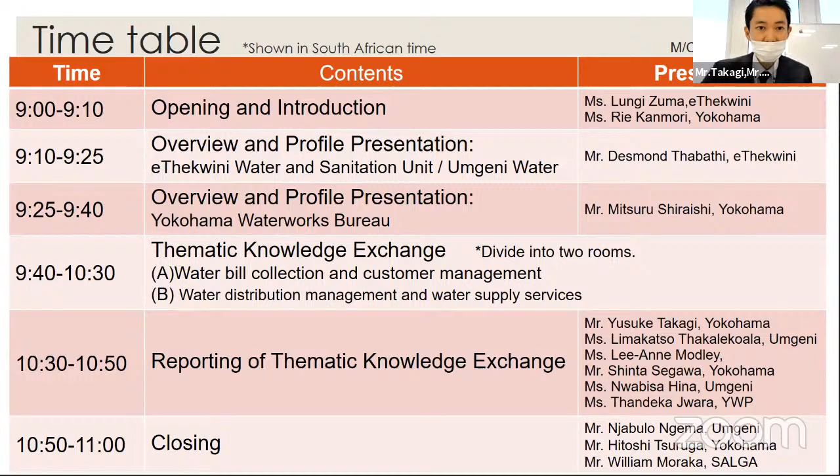Thank you very much, Mr. Takagi. Good day, everyone, and thank you for attending this knowledge exchange seminar between young water professionals from Durban in South Africa and Yokohama in Japan. From the South African side, we are joined by young water professionals from eThekwini Water and Sanitation, the water services provider in eThekwini municipality, young water professionals from Umgeni Water, the bulk water supplier within the province of KwaZulu-Natal, and young water professionals from the Water Institute of Southern Africa, WISA. These three organizations cover a sizable portion of the young water professionals working in the water sector in our city and province of KwaZulu-Natal. So from the South African side, I believe we are well represented.

I'm hopeful and certain that the seminar will go well and both parties will learn from each other, contributing to the improvement of the work we do for our citizens and residents in our respective cities. Let this newly formed relationship not end here, and let us carry on engaging on a smaller group basis, based on our different work areas. So colleagues, with this short introduction, I wish us fruitful discussions for the rest of the seminar.

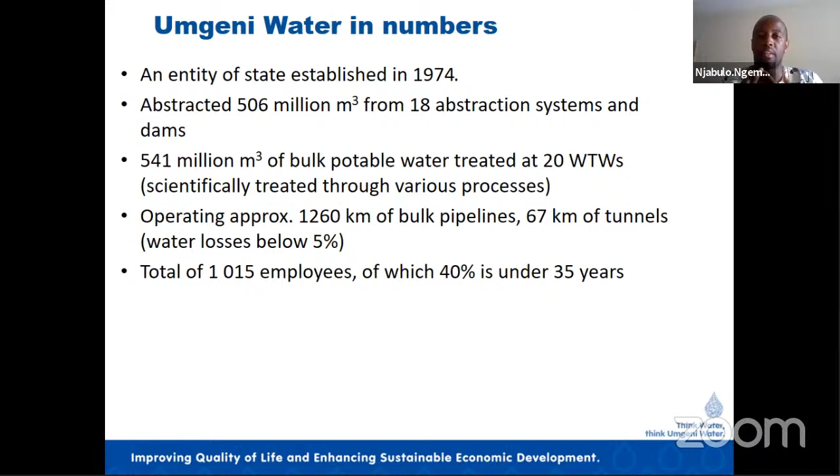Organizationally, we are not that big as yet. We employ just over 1,010 people, and interestingly enough, 40% of our total population are under the age of 35, which makes us a fairly young, dynamic organization. It's always interesting when one is given opportunities to participate in knowledge sharing exercises at this age.

So we're a fairly young organization age-wise. As I said, we supply at least 7 municipal customers at this moment in time, and the population that we supply is closer to 9 million. Take into account that eThekwini, or the city of Durban, is the most populous city in the province, so I think the numbers are around half of this, around 3.7, 3.8 million, I'm not too sure. But this means that the city of eThekwini is Umgeni Water's biggest customer, in simple terms.

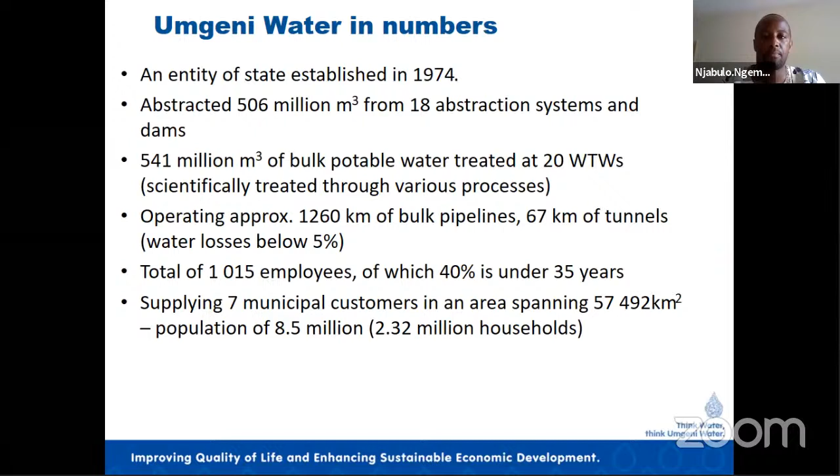The entire province of KwaZulu-Natal is home to about 11 million people, and 70% of that population is found in this tiny corridor of the cities of Durban and Pietermaritzburg. This is where the backbone of Umgeni Water's bulk infrastructure resides. So it's by no fluke that eThekwini is our biggest customer, that's where most of the population in the province is situated.

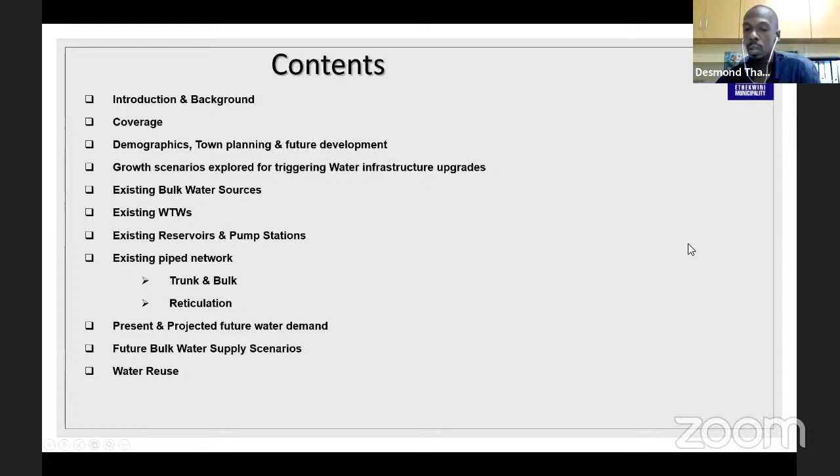As might have been highlighted by Umgeni Water, EWS is a water services authority, and obviously we need to comply with the requirements of the Water Services Act. We are a metropolitan municipality within the KwaZulu-Natal province with diverse cultures, demographics, and town planning schemes.

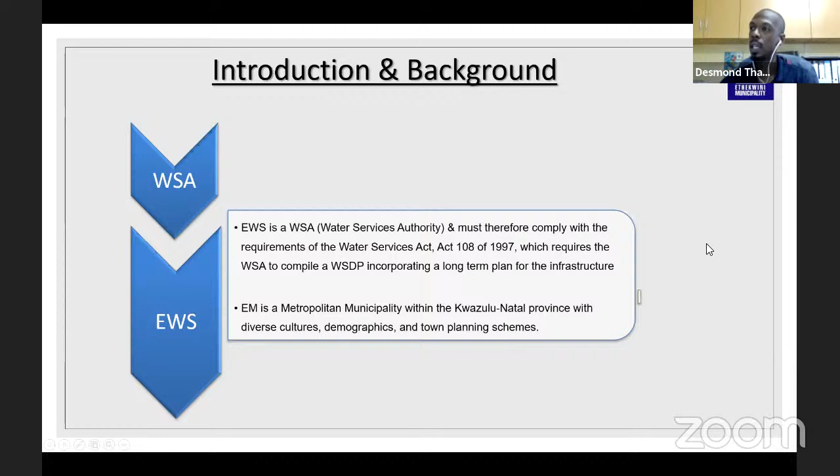From about 2 slides before Njabulo ended his presentation, he showed a larger overview of the KwaZulu-Natal province. We constitute about 2,500 square kilometers within the province, and within eThekwini municipality, we are subdivided into 5 regions: north, central, inner west, outer west, and south.

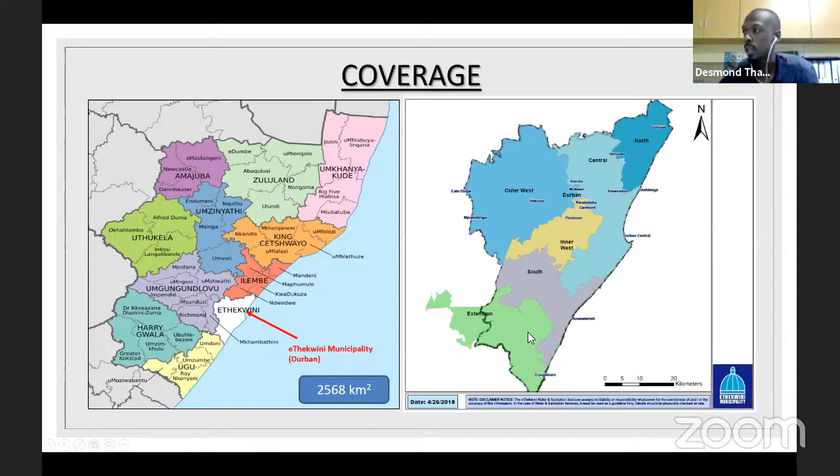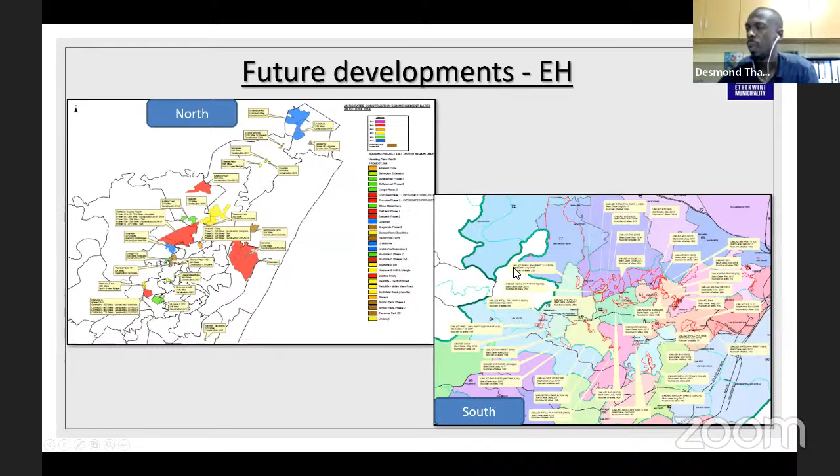There are a few developments earmarked within the municipality, some being private developments and some managed by or introduced by the government as human settlement developments, which puts a strain on the current supplies and storage capacities of the current setup. Some are just examples of developments already earmarked in the municipality, and there's a whole lot of them which we would need to provide water supply to.

Sorry, is someone trying to say something? I don't think so, so you can continue. Okay, alright, thank you for that.

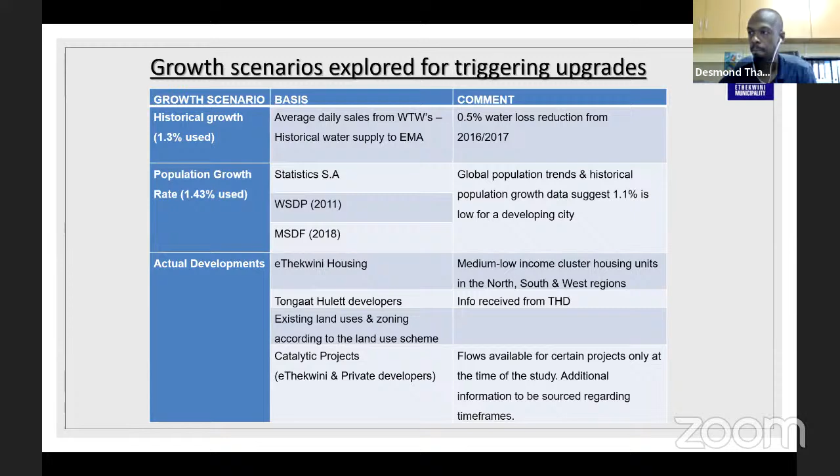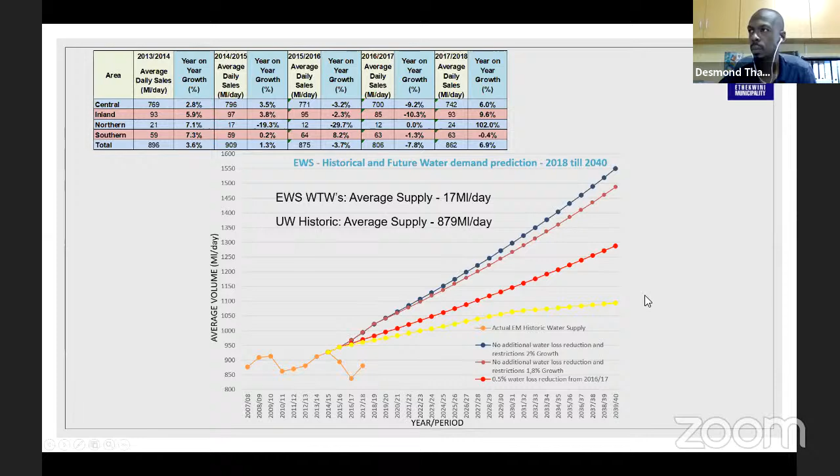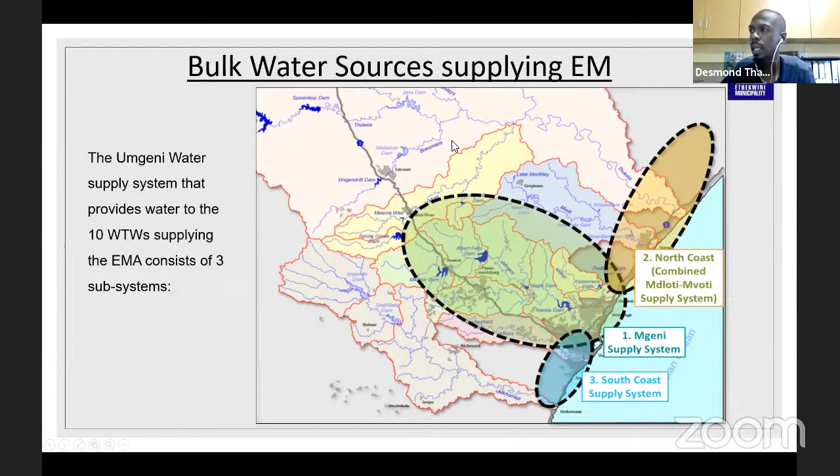Again, this was covered by Umgeni Water. Our supply comes from the Umgeni system, and there is a planned supply from the south coast and the north coast, as outlined in the Umgeni Water presentation earlier on. That was also covered in Jabulo's presentation, where he spoke about the Mearns Weir and Spring Grove Dam that he mentioned earlier.

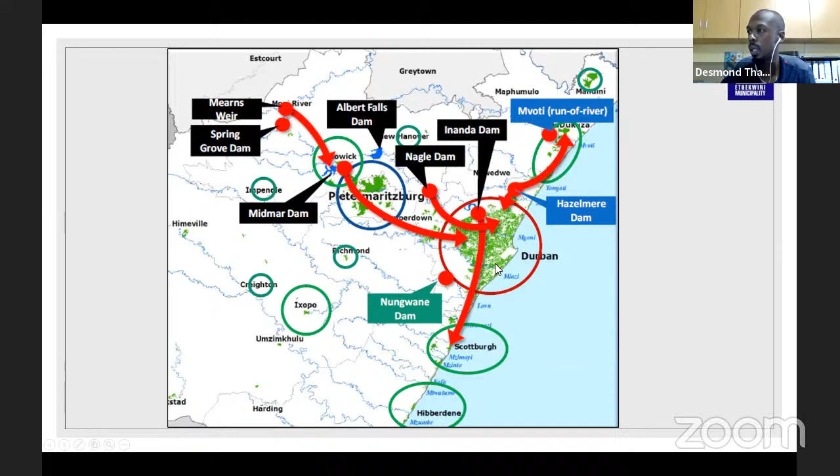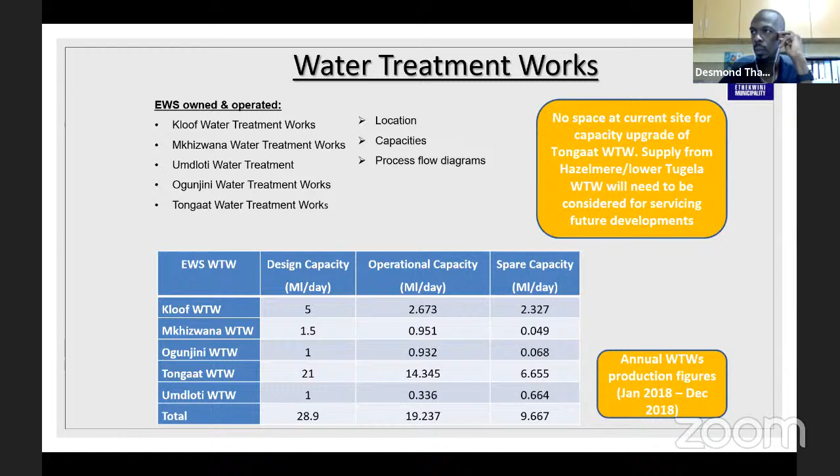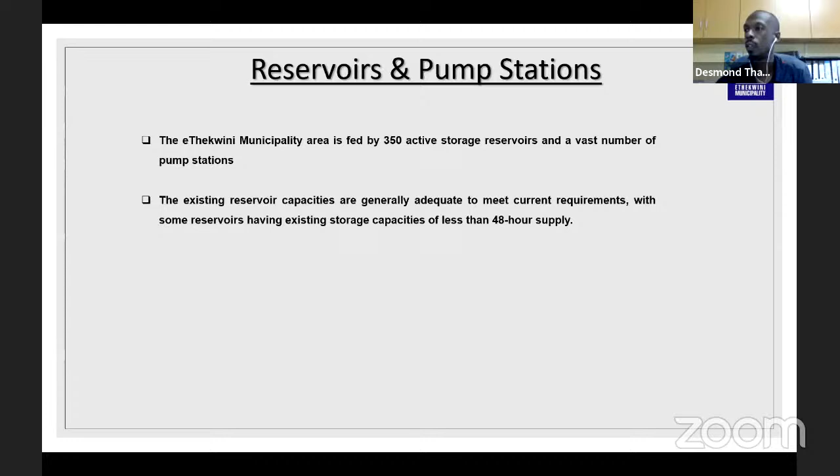eThekwini municipality is fed by about 350 storage reservoirs and a vast number of pump stations within the municipality to push water to our consumers. The existing reservoir capacities are generally adequate, although some are still lacking in terms of providing 48-hour storage for consumers during load shedding periods, and of course if there are major bursts and leaks that we need to attend to.

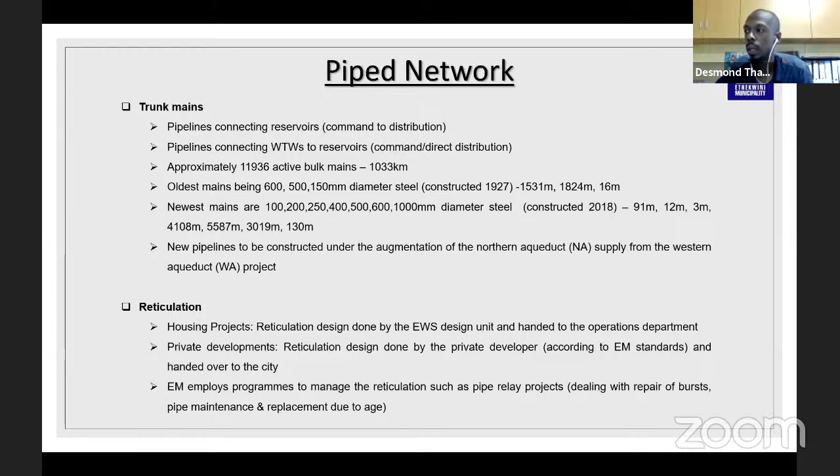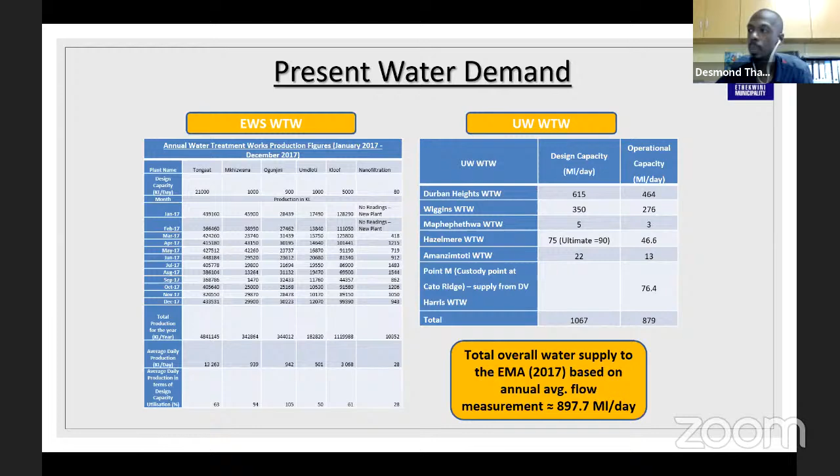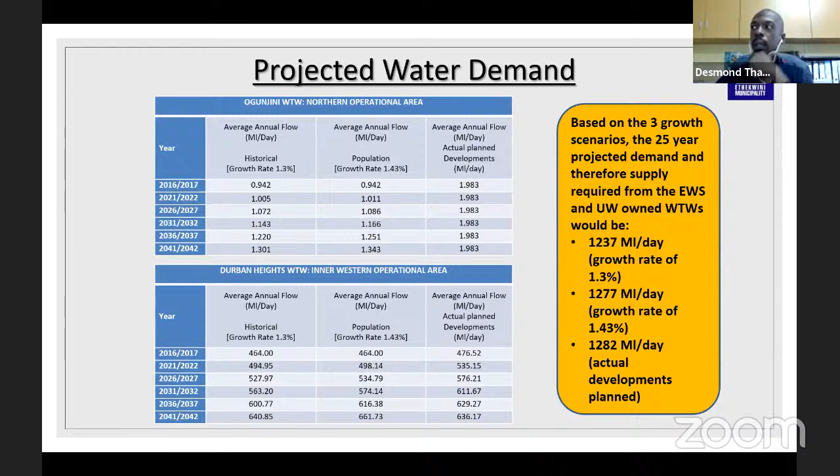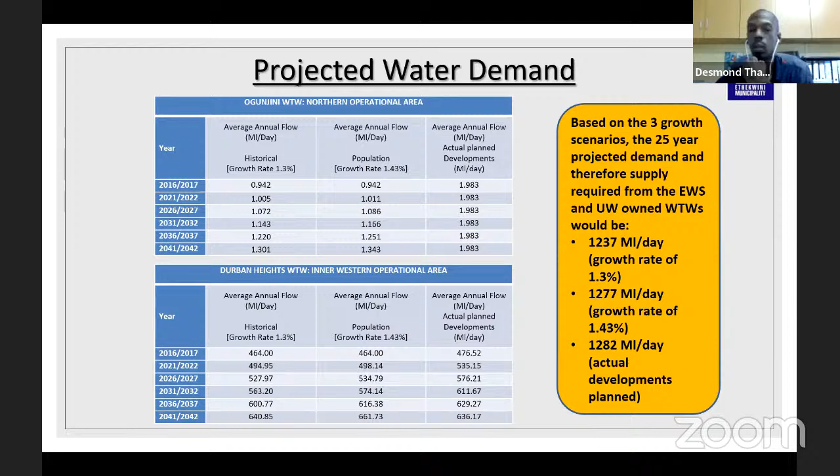The water demands currently, based on a couple of years back, averaging about 897 megaliters per day, and that may have changed by now. I'm pretty sure Jabulo would have covered that in his presentation. Based on the three growth scenarios, the 25-year projected demand therefore requires that EWS would need to upgrade or construct new storage to meet the demands that are required.

There are a few supply scenarios that have been looked at, which is getting water supply systems that would feed the Umgeni water, eThekwini municipality, in order to meet the requirements over the next 25 years. That includes some schemes down in the north and the south coast of the municipality, and of course from the Umgeni water system.

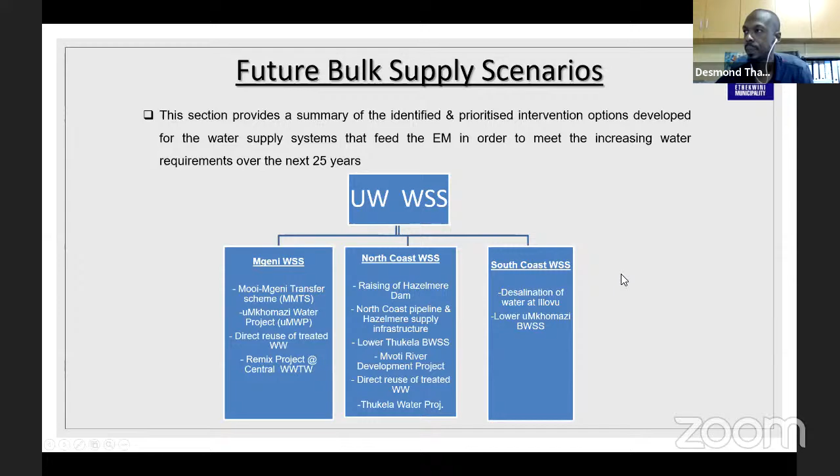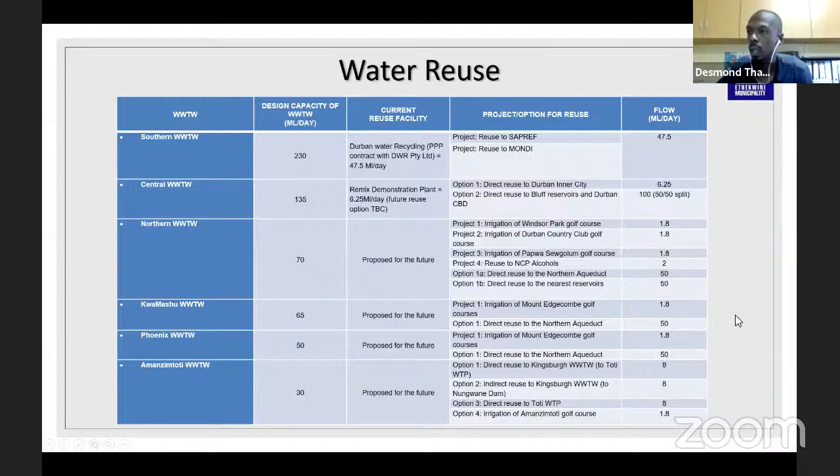There are also options that have been looked at, which is looking at the reuse of water, being the clean water or wastewater resources that we can tap into. That would mean looking into the various wastewater treatment works and seeing solutions out of that. These are just a few wastewater treatment works that have been looked at as possibilities for water reuse, and that's just a few more of those. So as you can see, there are a couple of wastewater treatment works that we could be using for such a solution.

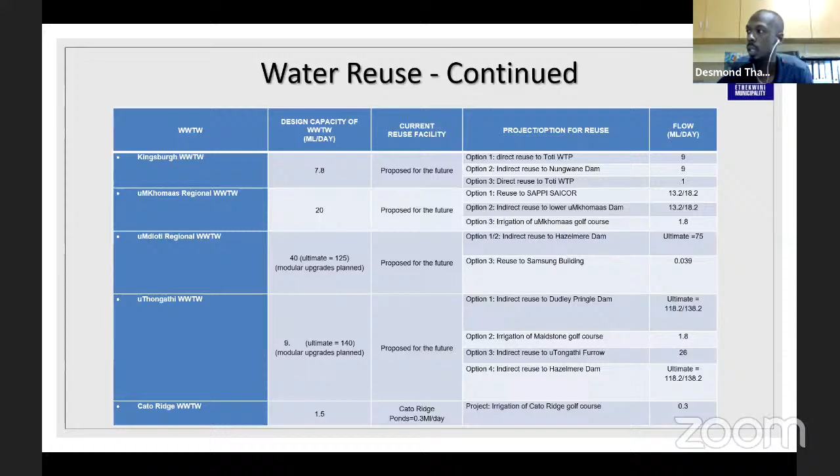The current challenges we experience as eThekwini municipality is the SCADA system and the telemetry infrastructure, which would go a long way in making sure that we do not have any outages or extended water losses within our systems. Of course, cathodic protection is one of the other issues that we are having challenges with. The current system or protection that we've got is either vandalized or is not operational, so that obviously affects the lifespan of our pipelines.

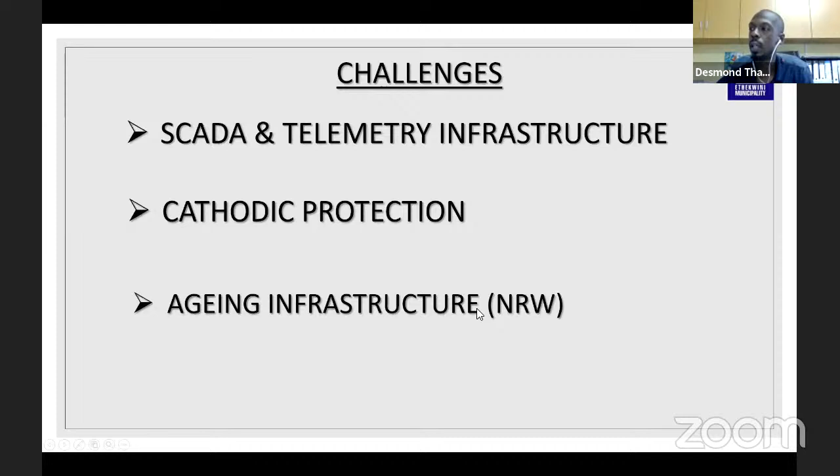Aging infrastructure is a serious issue as well. Some of the pipes were laid in the 60s, 70s. So pipe relay programs are obviously some of the options that needs to be looked at in order for us to reduce our non-revenue water amount.

I think, due to the time limitations and all that, we've tried to summarize as best as we can. And I would like to thank you all for the opportunity, and obviously thank our consultant for putting together the information for us.

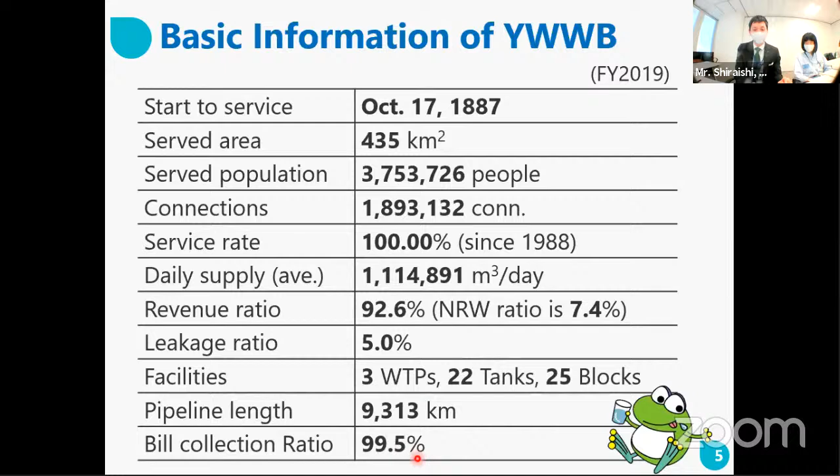This graph shows the transition of daily supply volume. Population is still gradually increasing in Yokohama, however water supply volume is declining. We experienced severe water shortage in the 1990s, particularly in 1995.

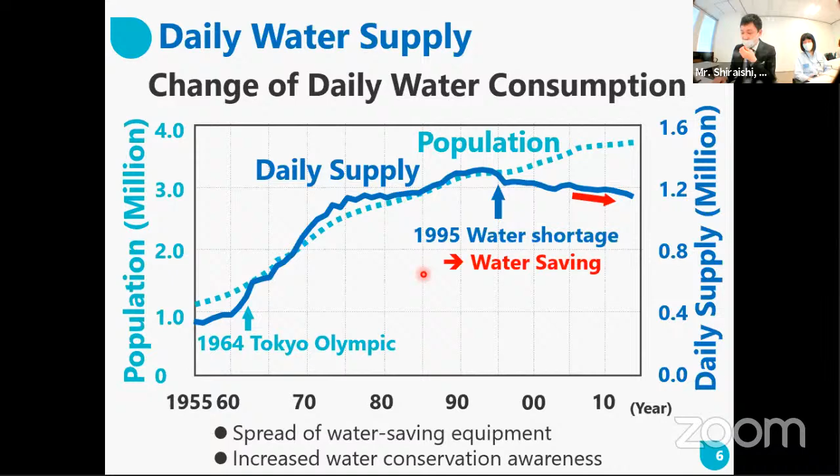We had suffered from a severe dry summer, and we campaigned saving water to citizens. Since then, water supply volume shows a downward tendency because of citizens' consciousness to save water and the effect of water saving technology. This tendency affects our revenue, and now our management circumstance becomes severe.

This is the water supply system of Yokohama Waterworks Bureau. We have 3 water treatment plants here and here: Kawai, Nishiya, and Kosuzume water purification plants. With 3 water sources, it has a total capacity of 1.7 million cubic meters per day.

All water sources are outside of the city. For example, in the Doshi River system, this yellow line, we carry water as far as 44 kilometers.

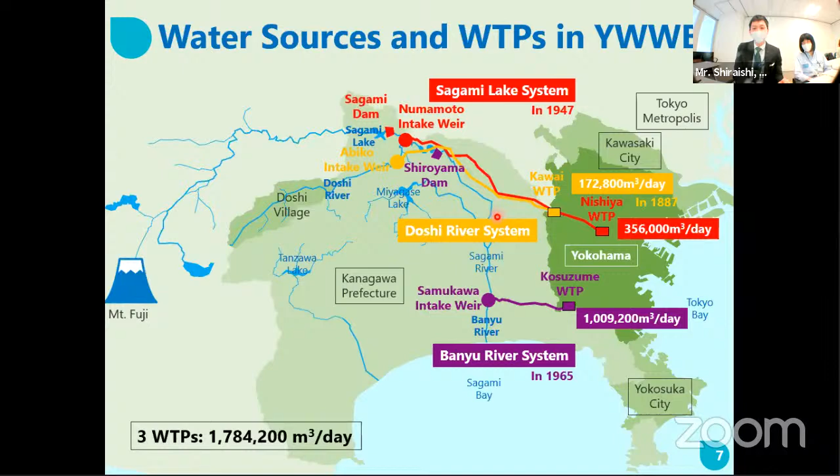In 1969, Kanagawa Prefecture, Kawasaki City, Yokosuka City, and we, Yokohama City, established the Kanagawa Water Supply Authority as a bulk water supplier. We call this KWSA. This authority purifies raw water taken from two rivers, Sagami River and Sakawa River, and supplies it to 4 member bodies of KWSA. In Japan, water supply is the responsibility of local government.

However, nowadays, it is promoted to supply water by a wider area, integrating several water utilities under towns or cities. The purpose is to prevent overlapping investment in waterworks facilities and ensure their efficient placement and management.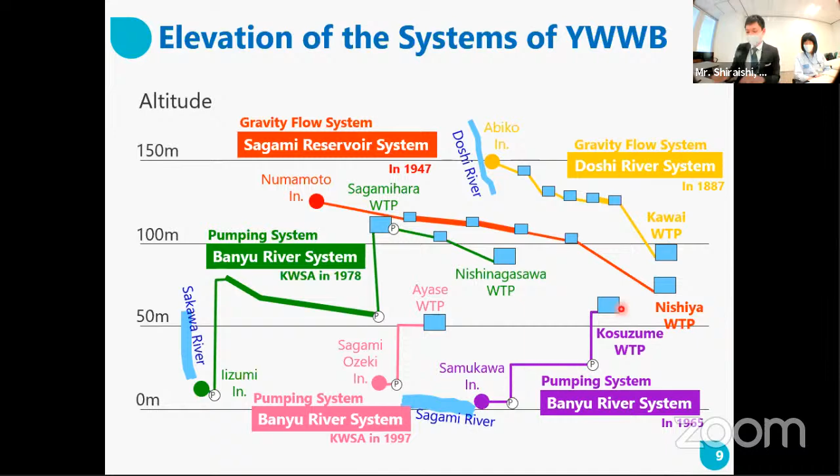From now, I would like to talk about water distribution. In order to ensure proper pressure throughout the city, we introduced a water distribution block system. We have 22 distribution reservoirs, and according to their arrangement, we divide the city into 25 blocks.

In general, each block has 1 distribution reservoir, 1 pump station, and we divide the area into two areas: one is a pumping area and another is a gravity flow area.

Yokohama has a rugged and complex terrain. In addition, during the period of high economic growth, a lot of pumps were installed unplanned. These situations made water pressure control difficult, so we have adopted this system since 1971.

The distribution system in Yokohama will be explained by Mr. Matsubara later in the Water Distribution Management and Water Supply Services section.

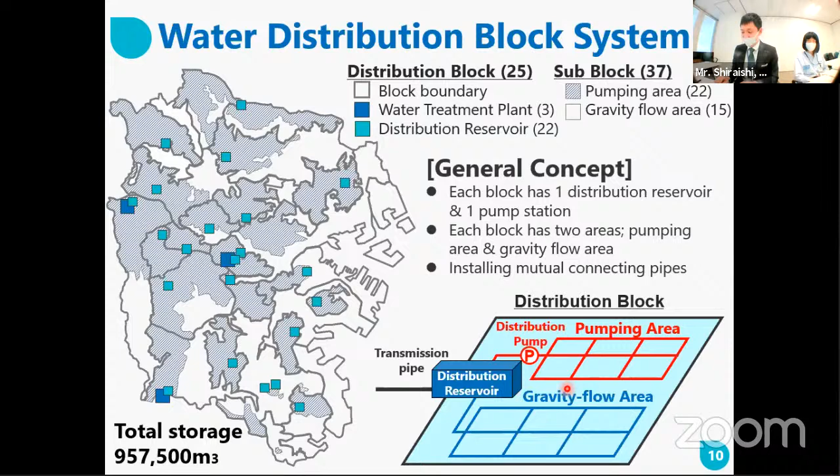As a breakdown, there are almost no illegal connections. This is due to the fact that the water supply coverage has reached 100%, and we have proper customer management and meter reading accuracy. Mr. Urata will explain about these things in the next section.

Now, I'm going to tell you about the history of leakage control in YWWB. As a countermeasure against non-revenue water, a leakage management section was set up in 1948. Since then, we have reduced water leakage to around 5 to 6%.

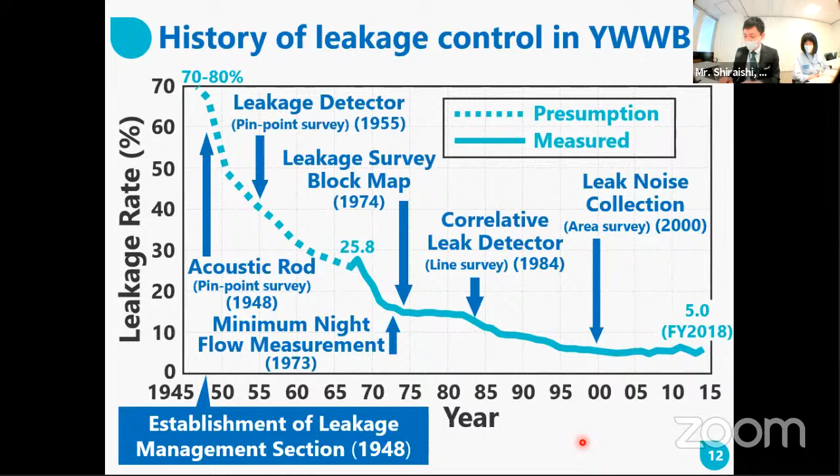We achieved this while introducing various technologies like these. We also started pipe replacement activities in 1970 to prevent water leakage and as a countermeasure for disasters. We are replacing distribution pipeline about 110 kilometers per year.

Next, I'll introduce two systems for managing water supply. First, SCADA, supervisory control and data acquisition. This is a system we use to totally manage water supply. We need to grasp various data on current water supply situations, such as water volume, pressure, and quality. For that purpose, the SCADA system is installed in Yokohama, which networks intake facilities, WTPs, water purification plants, distribution reservoirs, and water measurement equipment in the distribution network.

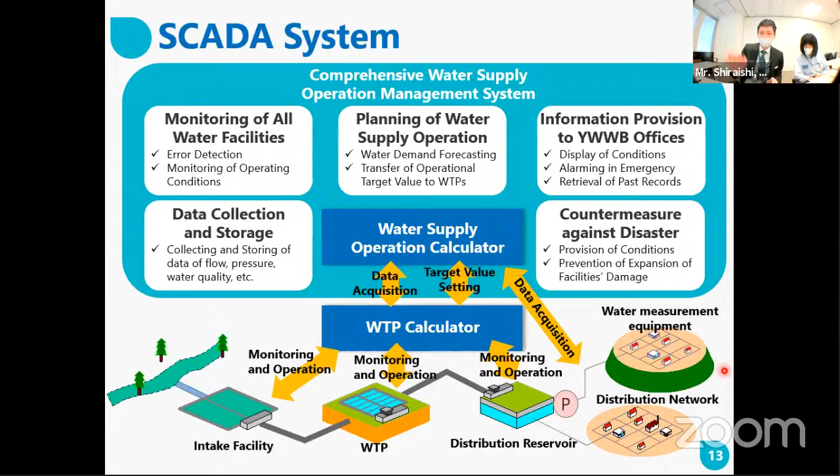Secondly, I briefly introduce our mapping system, aka GIS, the Geographic Information System. It is a data storage system of every kind of information of pipeline facilities, such as locations, the pipe size, the pipe material that we are using, and installed year, depth, and so on. The information of pipelines is stored here.

Based on the developed mapping system data, 1/500th scale paper pipeline maps like this picture are created and distributed to each operation and management office, OM office. Office staff use these maps for their day-to-day operation, and whenever there is a change, staff modify the maps by handwriting.

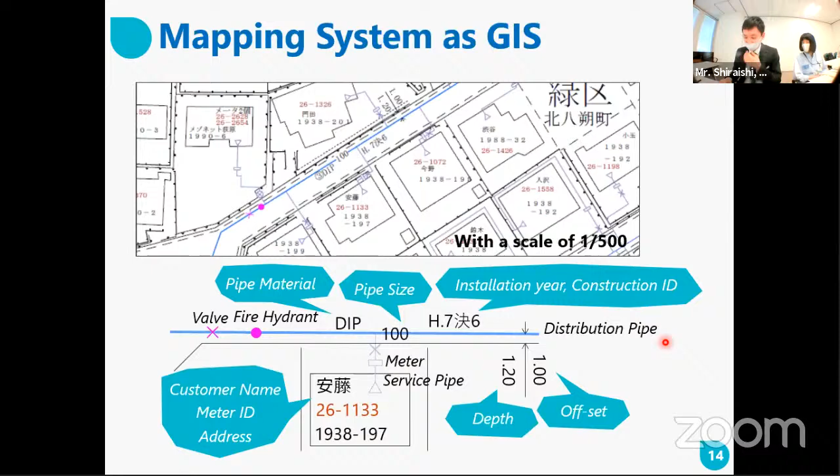Then, quarterly, the modified maps are submitted to this GIS section for updating. So we can say that these maps show the latest information of pipelines. These activities are strongly linked to stable water supply services and proper customer management.

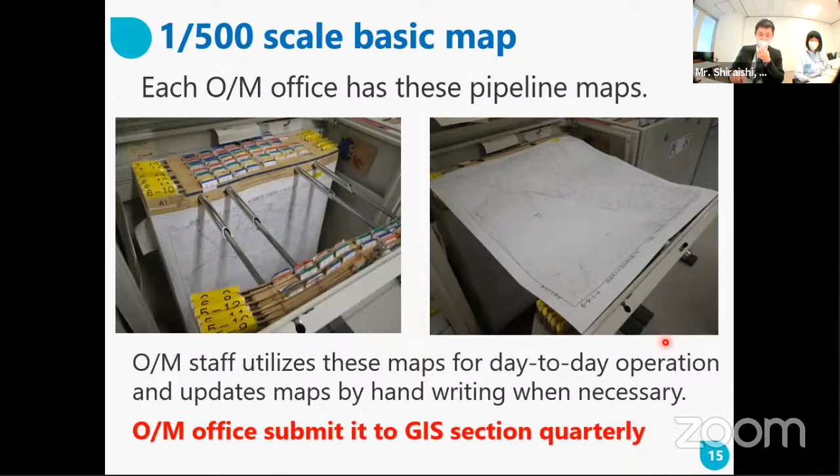And the metered rates differ according to the category of usage: domestic use of daily living, business use, and public bathing facilities. The charge is metered and collected every 2 months.

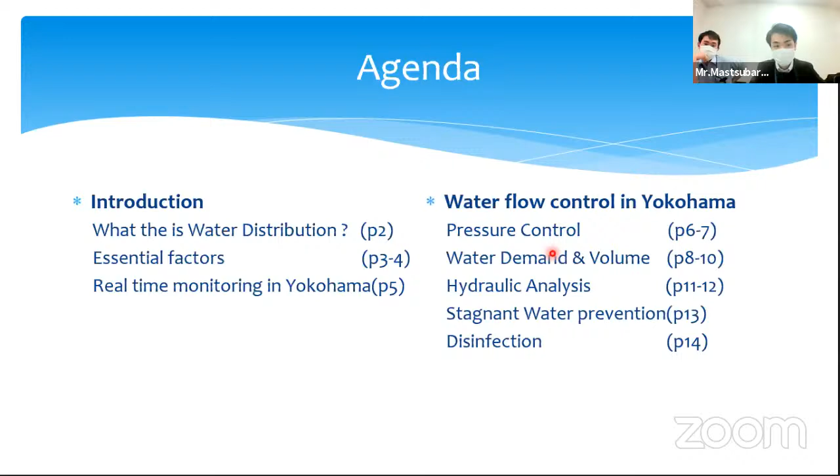So I'm in charge of the Northern Water Distribution Management Division. Today I'd like to talk about water distribution management. So this is today's contents in 15 minutes. First, I'd like to reconfirm what the water distribution is.

As you know, after the purification plant, water passes through treated water transmission facility and is stored in distribution reservoir and pumping station, and then distributed to each household through distribution pipe network and service pipes.

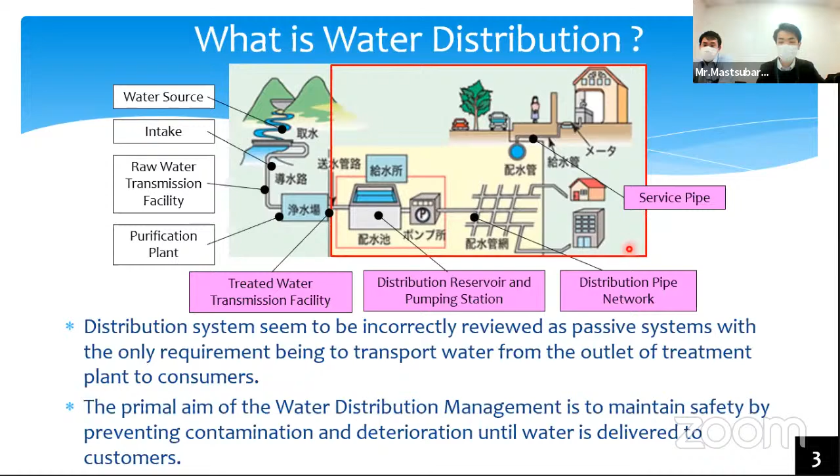We shouldn't forget that the primary aim of the water distribution is to maintain safety by preventing contamination and deterioration until water is delivered to customers. So then, what should we think about? Essential factors of water supply are quantity and pressure and quality, or maybe disinfection.

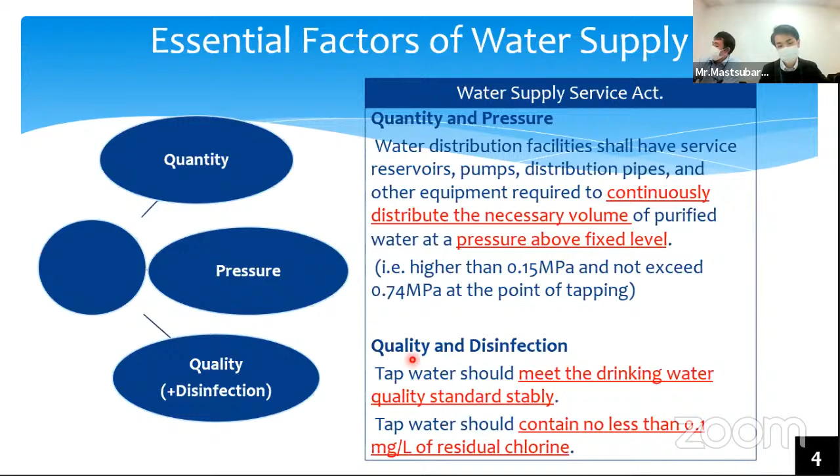The Water Supply Service Act in Japan stipulates the requirement for each factor at the point of tapping: first is quantity and pressure, and also quality and disinfection. In Japan there are 51 drinking water quality standard items. This is composed of 2 biological standards, 33 chemical and 5 physical items, and 11 disinfection byproducts.

Sampling points should be at the water tap in principle. The relationship between water quality standards items and water distribution management is quite complicated. Stable water supply, pressure control and disinfection, stagnant water prevention, and water flow control, and the integrity of them are indispensable. Today, I will explain some essential parts of how YWWB manages and controls the water situation inside the pipeline.

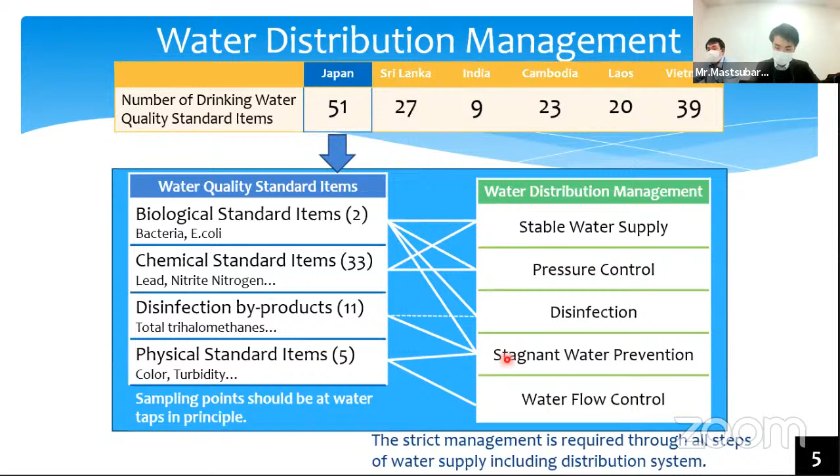One important thing is to grasp the current water flow situation. We are monitoring the status of water flow in real time by using the SCADA system.

Especially for water distribution management, we think the important things are quantity, pressure, turbidity, chlorination, and color in the pipes. By taking these data, we can not only grasp the current water flow but also notice changes and take care of them as speedily as possible. Moreover, we use this data for more accurate analysis.

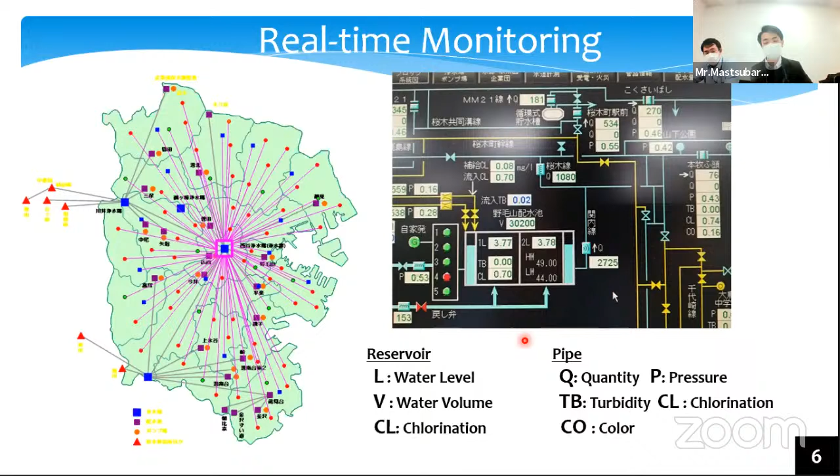Then I will introduce how we control and analyze. One important thing is water pressure. This picture shows an easy concept of water pressure on the left hand. When the reservoir water level is, for example, 49 meters and the ground level is 9 meters, we roughly understand the water pressure is about 40 meters, which is 0.39 megapascal.

This right-hand picture is the elevation map of Yokohama City. The red color area shows where the ground level is high, and the blue color area is where the ground level is low. In Japan, water pressure should be higher than 0.15 megapascal and not exceed 0.74 megapascal at the point of tapping. But Yokohama City consists of complicated rolling hills, so YWWB had a lot of difficulty managing the pressure.

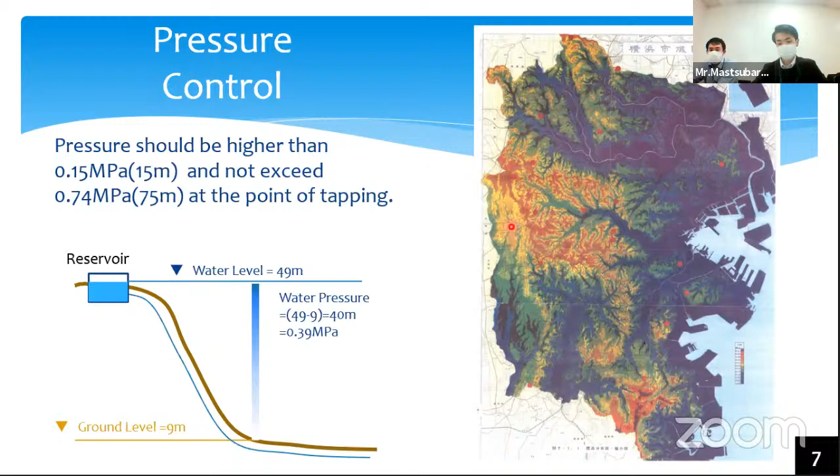So YWWB adopted the distribution block system in 1971 to regulate the pressure. YWWB divided Yokohama City into 25 blocks, and each block is an independent water supply area. The vertical boundary of the block is determined by elevation, and the horizontal size is determined mainly by the scale of reservoirs. So even now, we sometimes change the boundary.

The main merits of the distribution block system are mentioned below. The main points are the accuracy of management and the ease of recovery. Rather than looking at the whole of Yokohama City, it is easier to understand the water supply situation and easier to regulate. Even if an accident happens, it would be easy to identify the location and the influence would be limited inside these boundaries.

The block system is also useful to control the volume. A distribution reservoir has the function of storing the treated water and adjusting the amount of water supply. Yokohama City has 22 reservoirs. This picture shows Nogeyama Reservoir with a capacity of 40,000 cubic meters.

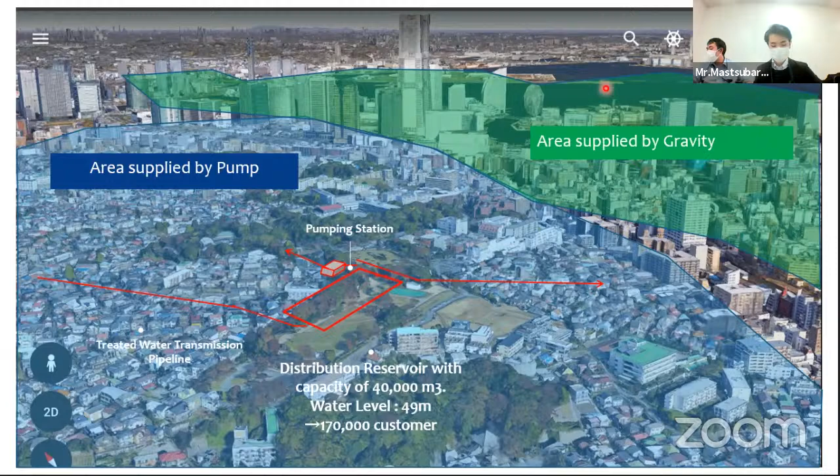This is an average scale reservoir in Yokohama City, and it supplies water to about 170,000 customers. As I showed in the recent slide, the blue area, where ground level is high, is supplied by pump, and the green area, which is near the seaside area, is supplied by gravity.

To manage water more accurately, we also care about the amount and the change in the days. This graph shows the change of water demand in some day in the Miho pumping area. For example, in the midnight, as many people sleep, water demand is very low, but after people wake up, they go to the bathroom, cook breakfast, or go to the toilet, so the demand will increase at this level.

This pattern depends on the situation of the region or area. An area which has many office streets will have a different pattern. By grasping this tendency, you can distribute the water certainly and efficiently.

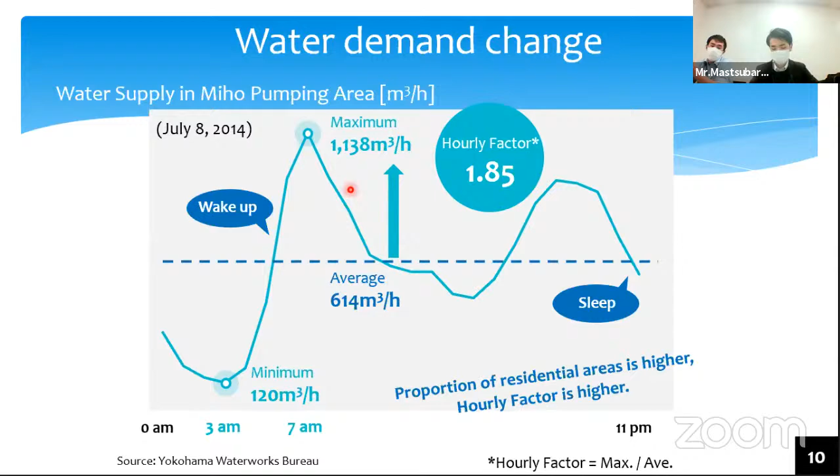To characterize the area, we set a coefficient named the hourly factor. The hourly factor can be calculated by dividing the maximum volume by the average volume. For example, we can decide how much amount we should keep in the reservoir, or it is useful to predict the maximum volume inside the pipelines, which is important for hydraulic analysis.

If the Buko pumping station stopped due to an accident, the Nishiya pumping station and the Imai pumping station would shoulder the north part of the Buko area and the southern part of the Buko area, respectively. But it's not so easy because there will be a big change in volumes and pressure also. We prepare backup plans for each of the 25 blocks so that we can supply water continuously even in case of accidents.

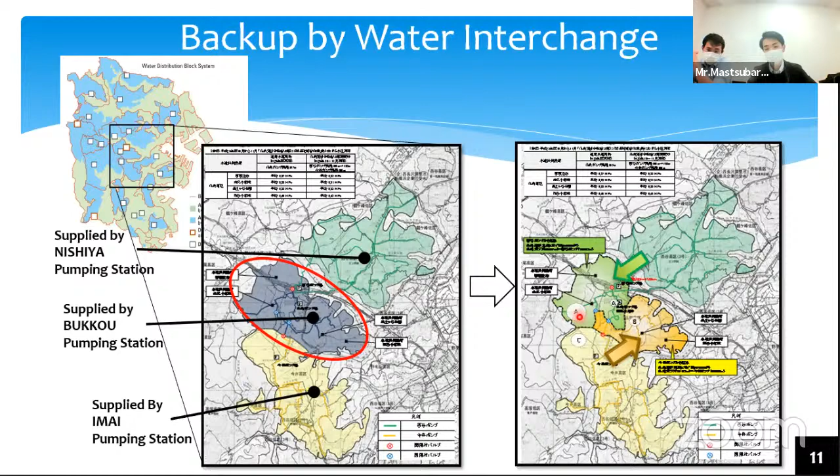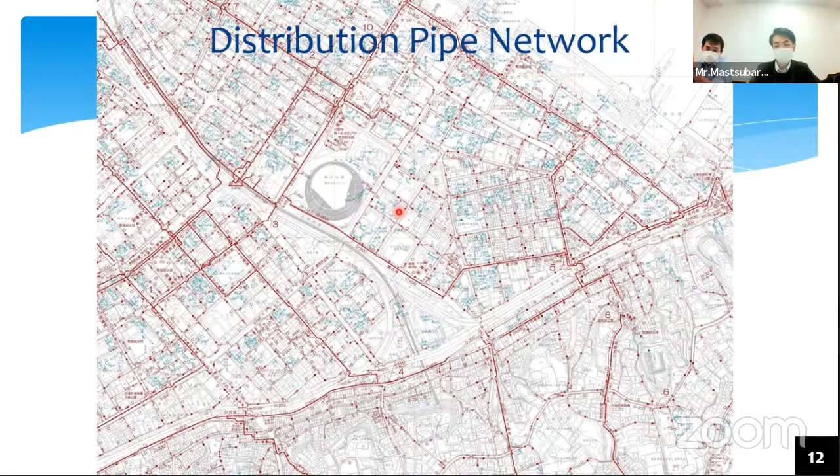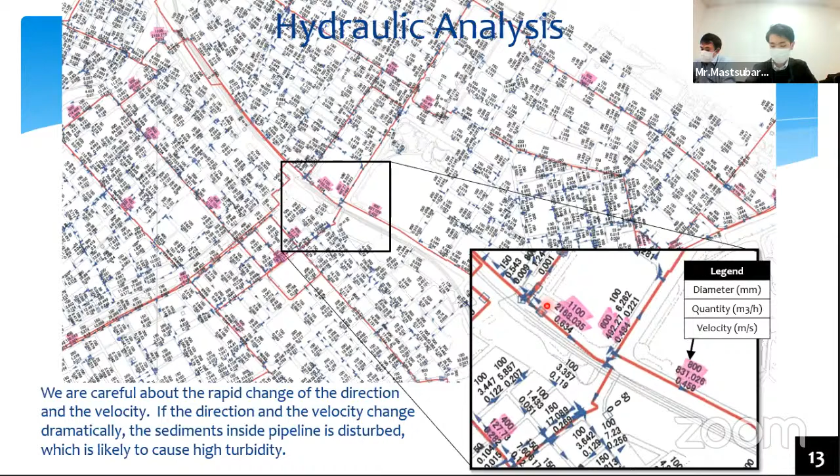Each node also has information about pressure and water demands. We consider methods to keep the essential factors in the best condition. After this analysis and planning, if we want to change the water situation, we shut or open the valve and change the water flow in distribution management.

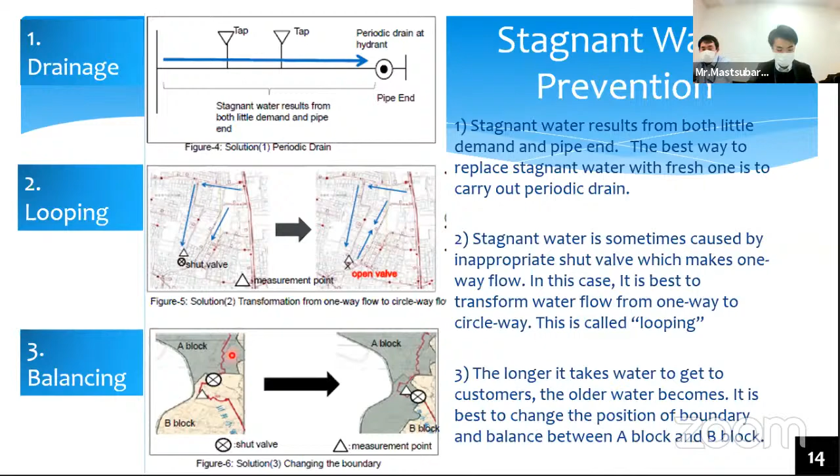These were about the essential factors: pressure, volume, quality, and disinfection. There are still more things to control, for example turbidity, but I won't go into details today. I'm pleased if you realize how important, complicated, and difficult water distribution management is. Water distribution management contributes to safe and stable water supply and definitely leads to improvement of public health and living environment. Thank you for your attention.

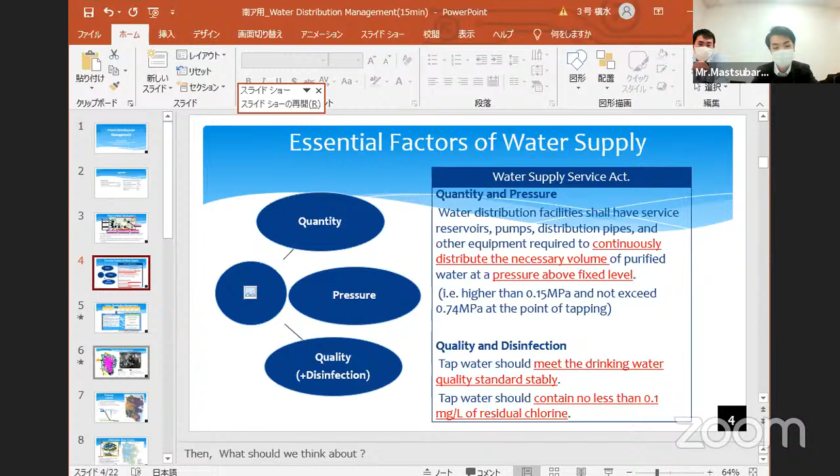And about quality, it is also controlled by some different distributions, and we actually control mainly about slide number 6, quantity and pressure, and about water quality, we mainly control turbidity and chlorination.

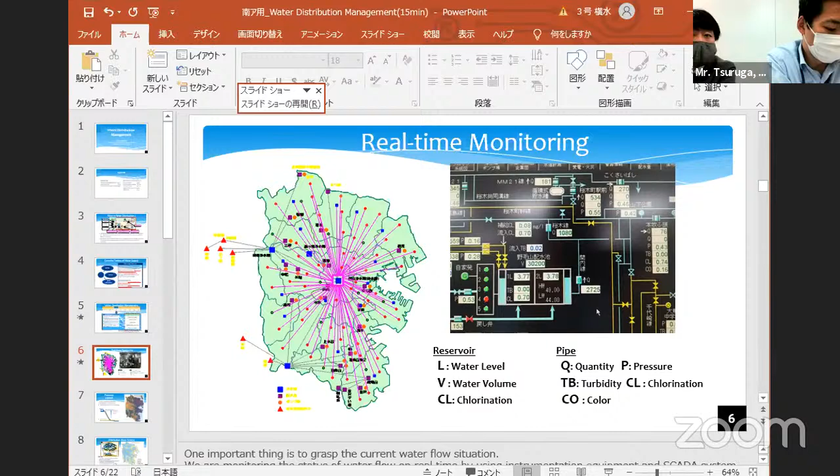Yes, your question is how do we keep the quality of water? Of course, the water quality at the outlet of the water treatment plant will secure the Japanese national standard. But in the water distribution system, it is important to keep water quality by keeping water pressure stable and preventing stagnant water.

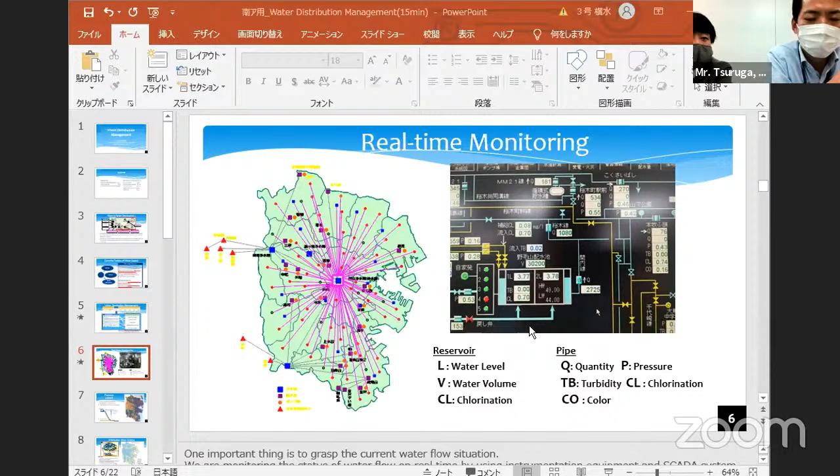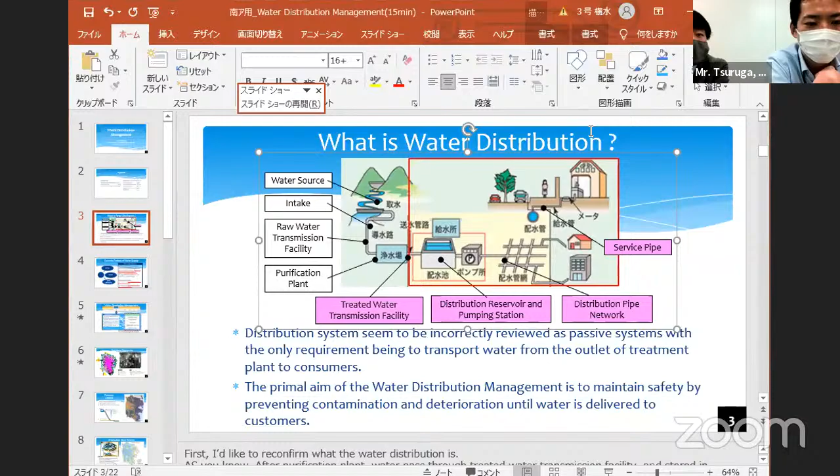Yes, slide 3. Yes, please. Second point: the prime aim of water distribution management is to maintain safety by preventing contamination and deterioration until water is delivered to customers. This is the factor of water distribution management to keep quality.

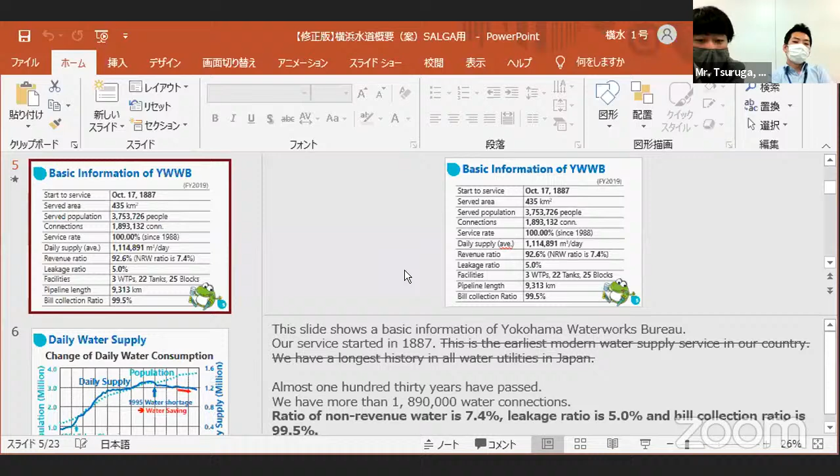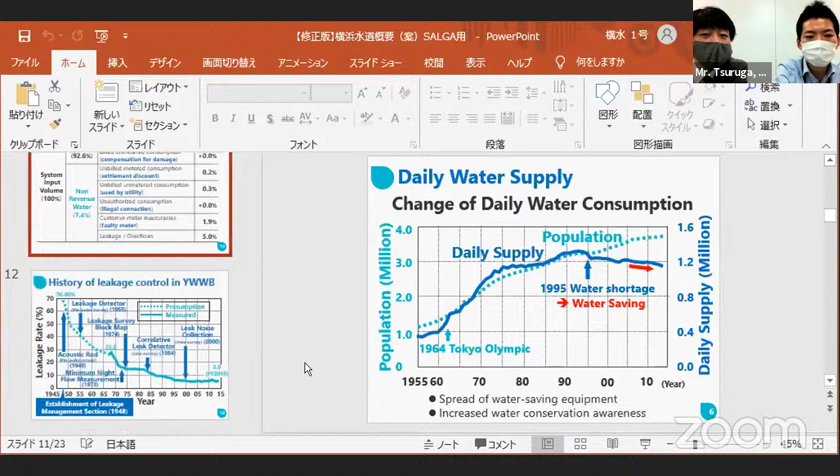Could you wait a moment? Okay. You mentioned this slide. This one. Yes, this one wasn't a different page? Yeah, this one. That's not this one. This one is better, I think. Okay.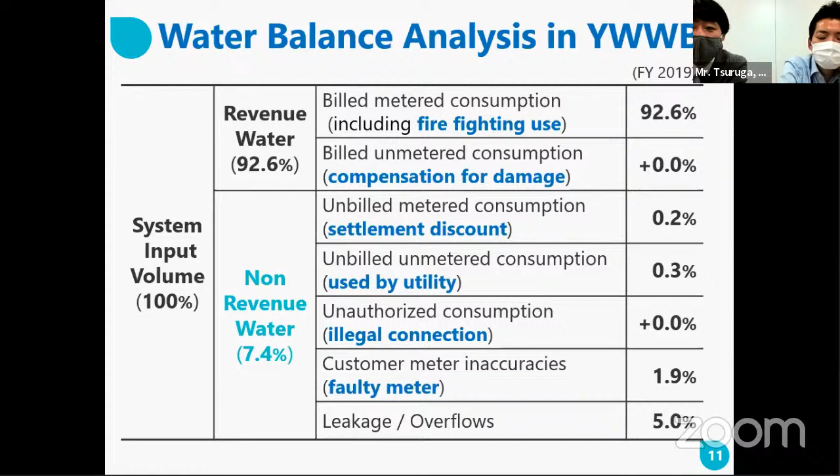This one is not billed water. This one is revenue water. So actually, system input volume minus non-revenue water ratio is this one. So this one is revenue water, not billed, not billed amount. And billed amount for billed amount.

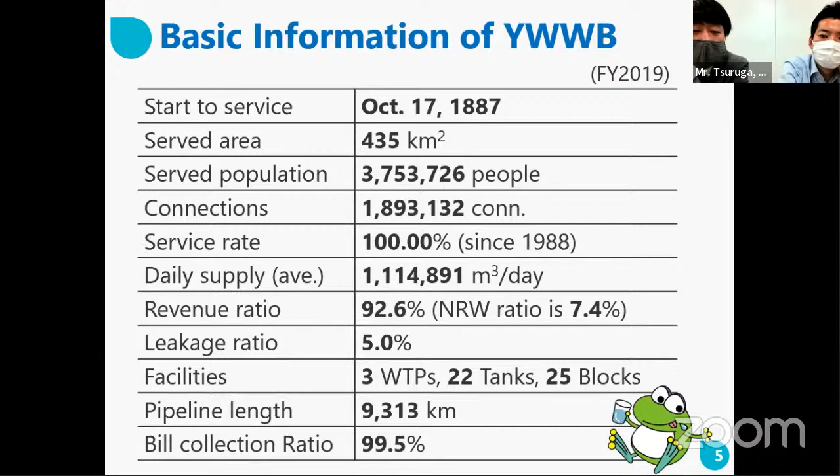Just a moment. Yes, this one. 99.5% of customers pay - this is the situation. Okay, do you understand? Are you clear? This is the answer. Okay. All right, thank you, that question is answered.

I'm sorry, question number two. I want to ask if the hydraulic model that you showed is a live model from real-time data, or is it just a model that you use from your collected data? Is it real-time? Is it a real-time model that you showed us earlier on for the city of Yokohama?

Sorry, please give me the hydraulic model. Yes, what I want to know is, is it a live model where you're getting real-time data from your meters, feeding information into your hydraulic model, or is it a manual one?

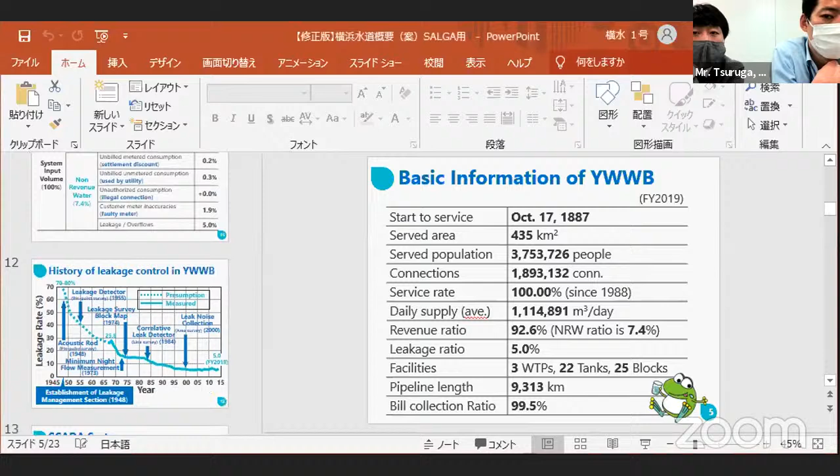Just a moment. This is our history. First we make leakage survey block maps. We prepare, and one by one we survey the areas, and for a 3 year interval we check the whole city. This is our way, and we introduce a lot of technologies, but it depends on the pipe installation situation and pipe material.

In Yokohama we adopt the ductile iron pipe for distribution pipe, so it's actually easy to detect the leakage. But for PVC or HDPE, the leakage sound is very small, so it's very difficult. I understand the situation. But we combine a lot of technologies and identify the leakage point. So yes, this is the situation. Is that okay? Thank you.

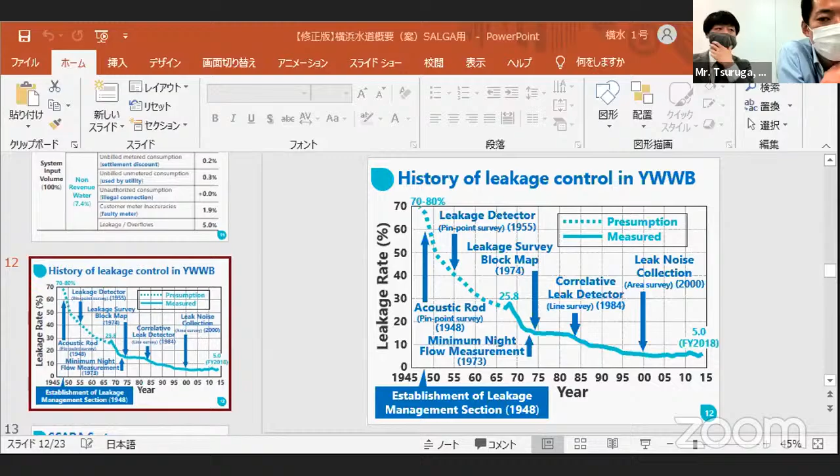Can I add something? By using the SCADA system we keep the water pressure high. When the water pressure goes down very quickly, that means leakage is happening, so that's one way we can detect leakage. By putting many attachments in the pipelines to send data to the SCADA system, we can also grasp, not pinpoint, but detect the place by area. Then we can cut off that area, or using backups, we can keep the water supply. After cutting off some area, we can detect where the leakage happens. So that's how we reduce non-revenue water when leakage happens.

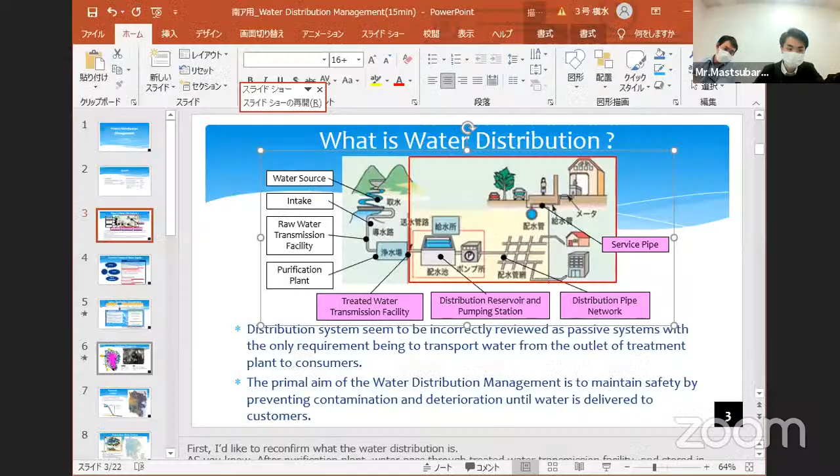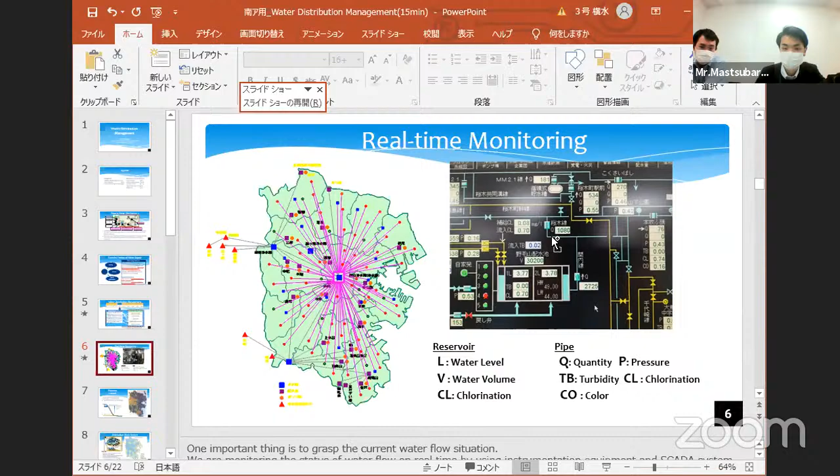Each point has a sensor, yes, as you say. We have many types of sensors for turbidity, water quality, water pressure, and water volume. So yes, this is the situation. You can see the different colors.

Thank you. This is the last question, so I'll try to be quick. In terms of your SCADA control room, is this a broad overview of Yokohama city, or do you have separate control rooms for each portion that you've divided the bigger city into? Thanks.

We can see the wide area version, and also each block, but it's a different monitor. We have to change the monitor, but it's the same system.

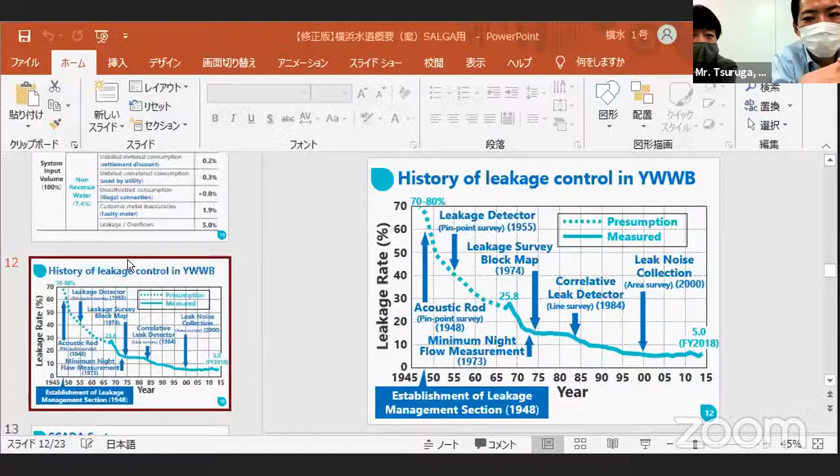Do you want to know the number of staff? This one, 1,500 staff we have, and we have 8 departments.

And so per waterworks, normally how many people do you have in one waterworks? In one water distribution management section, water distribution department, we have 272 staff.

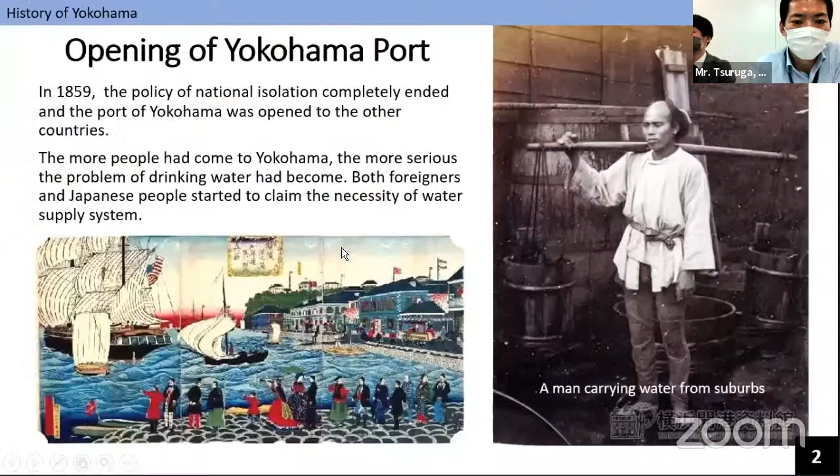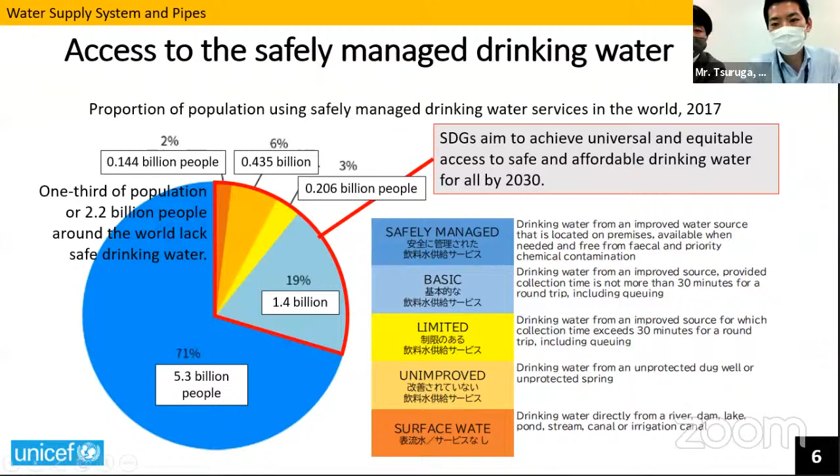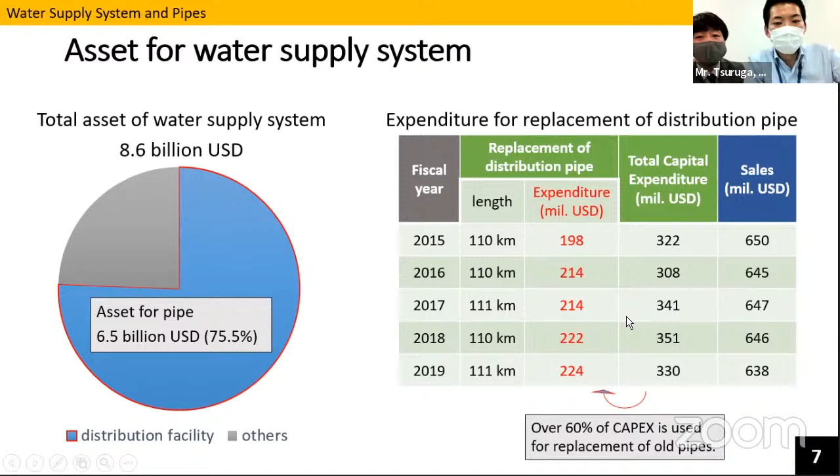The water supply system is called an equipment industry because capital expenditure accounts for the majority of total expenditure. This means that the cost for water supply business does not vary so much depending on the amount of water supply. The left graph shows the asset for pipe accounts for 75% of total assets in Yokohama water supply system. The right table shows that over 60% of capex is used for replacement of old pipes. Therefore, key factors to succeed in water supply business are both how well we can manage the water distribution system and how well we can collect water bills.

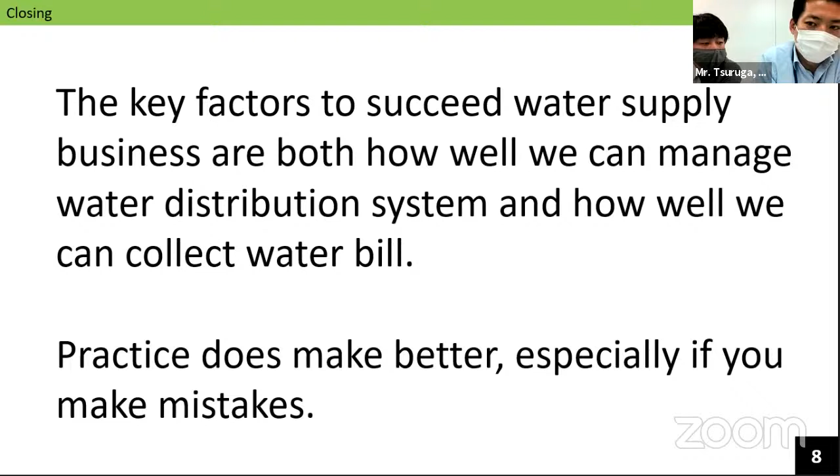Therefore, I think today's themes are very good. I hope that the South African side could find something from this seminar, and that you are eager to try it. But this is my message: don't just imitate our activities and practices, make them better, especially if you make mistakes. This is my message for both the South African side and the Japanese side. So Yokohama Water Works Bureau should not hesitate to share our experience and knowledge. Also, we can learn a lot of things from the South African side. Thank you very much for this opportunity. Thank you very much for your cooperation.